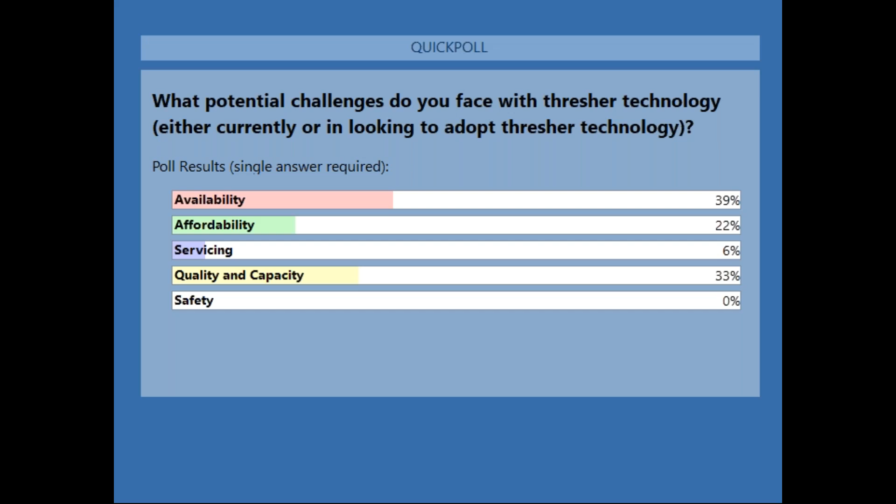Carrie, I know that it still says showing the poll on your screen. Is that still visible on your screen? I still see the poll, yeah. Okay, it's supposed to have been closed down. Is there any way we can switch over to sharing your presentation? There, can you see it now? Perfect, that is it. Many apologies. Thank you everyone for bearing with us. Sorry, Dr. Clark. No problem.

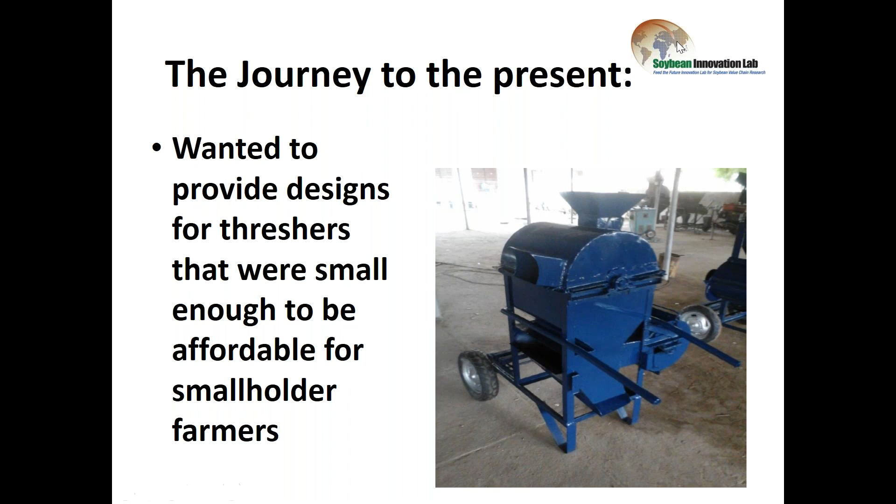Okay, so you guys can see the thresher there on the right was the first one we did. So we were also asked by an NGO in Ghana to make a bike-powered version, which we did also.

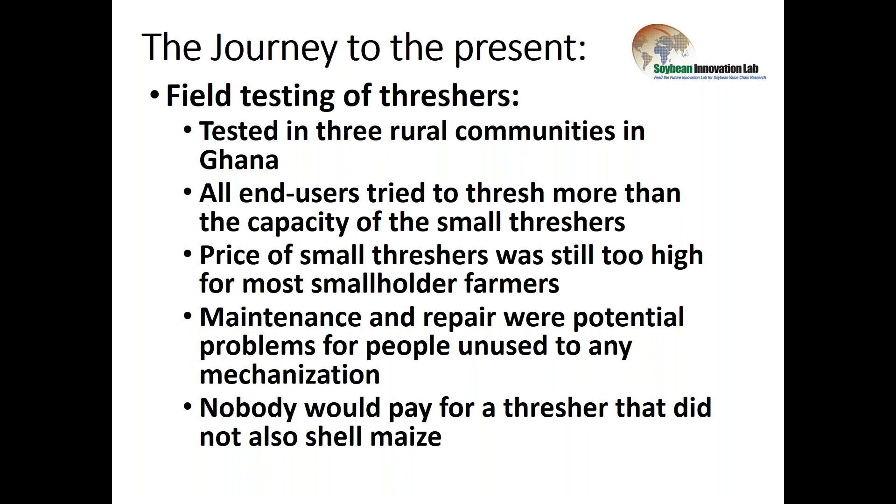So what did we find? Well, we field tested those threshers. We tested them in three rural communities in Ghana. And what we found was that pretty much all end users tried to thresh more than the capacity of the small threshers. So they tried to expand it to more than just one farm, or they tried to shove things into the opening, which jammed up the thresher. So we also found that the price of the small threshers was still too high for most smallholder farmers. During our field testing, we also realized that maintenance and repair were potential problems for people who are unused to any mechanization.

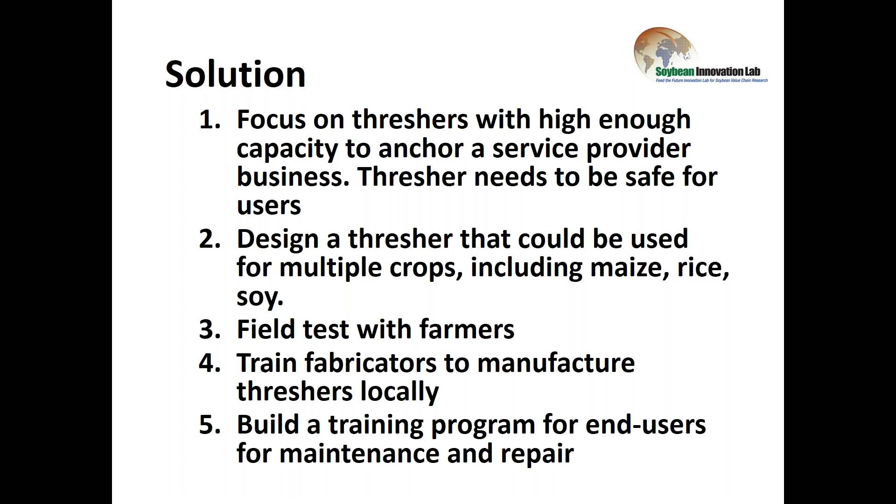During village or community surveys and focus groups, we were pretty much told that nobody's going to pay for a thresher that did not also shell maize. So our solution was to completely change the focus of our program. Now we focus on threshers that have a high enough capacity to anchor a service provider business, the service provider being somebody that would service maybe 30 or 40 farmers and make a living out of being a thresher provider.

We also wanted to make sure that thresher is safe for the users. So we designed a thresher that could be used for multiple crops, including maize, rice, and soy. We've been field testing that with farmers. We also train fabricators to manufacture threshers locally, which is a major aspect of our thresher program, because we do believe in local fabrication.

And we have also built a training program for end users for maintenance and repair. So to go over those objectives first: we focus on threshers with high enough capacity to anchor a service provider business. We used two Ghanaian fabricators who had extensive experience. They provided designs and working models, and we then field tested those.

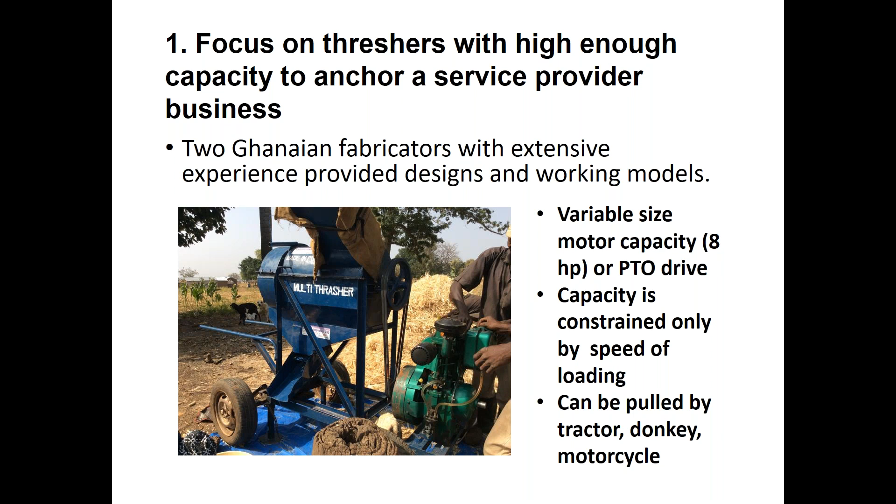They have variable size motor capacity. The one in the photo has an 8 horsepower motor. You could also have a PTO drive instead of a diesel motor. The capacity, or the speed that the thresher can go, is only constrained by the speed of loading. The thresher itself can thresh as much as you can put in it very quickly, but what's slow is putting things in it. Of course, maize loads a lot faster than soybean.

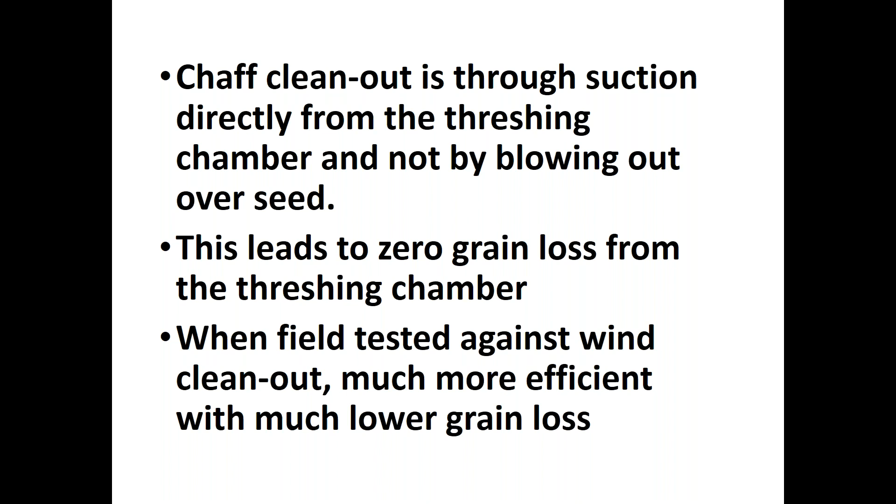And then we wanted something that could be easily pulled by various means, like a motorcycle, a tractor, or even a donkey.

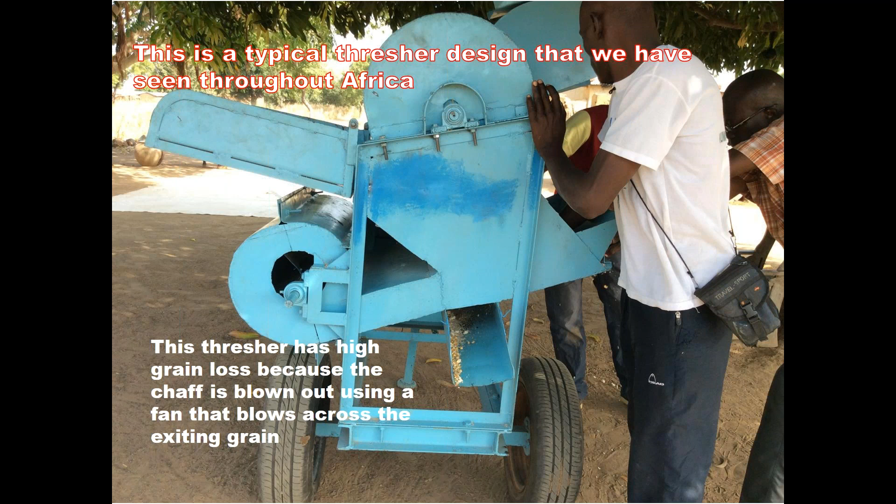One aspect of this thresher is that the chaff cleanout is through suction directly from the threshing chamber, and not by wind blowing out over the seed. I'll show you some pictures of what I mean in just a second. This kind of chaff cleanout led to zero grain loss from the threshing chamber. When we field tested this against machines that used wind cleanout, where it blows across the seed, we found that this thresher was much more efficient with much lower grain loss.

Here's a photo of a typical thresher design that we've seen throughout Africa. You can see there's a blower fan on the left side. The seed is fed into the threshing chamber at the top, the seed drops down, and then that blower fan blows across the seed to blow the chaff out. That design we found has very high grain loss because of that fan blowing against the exiting grain.

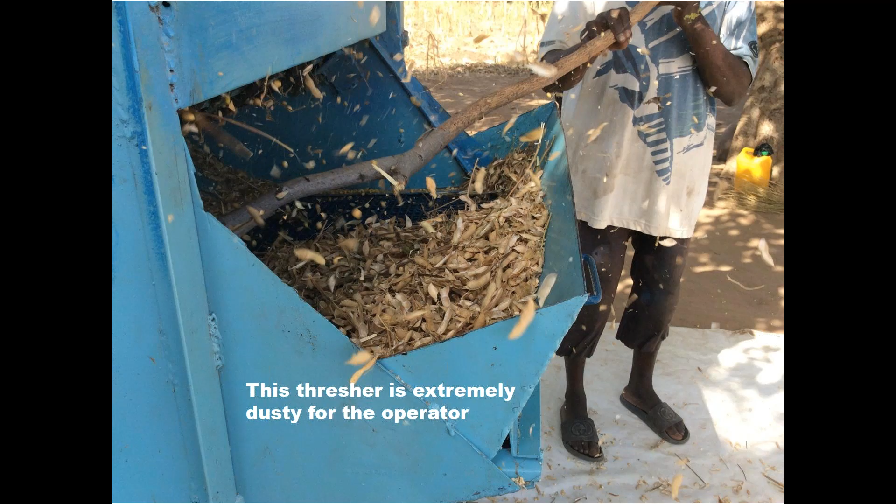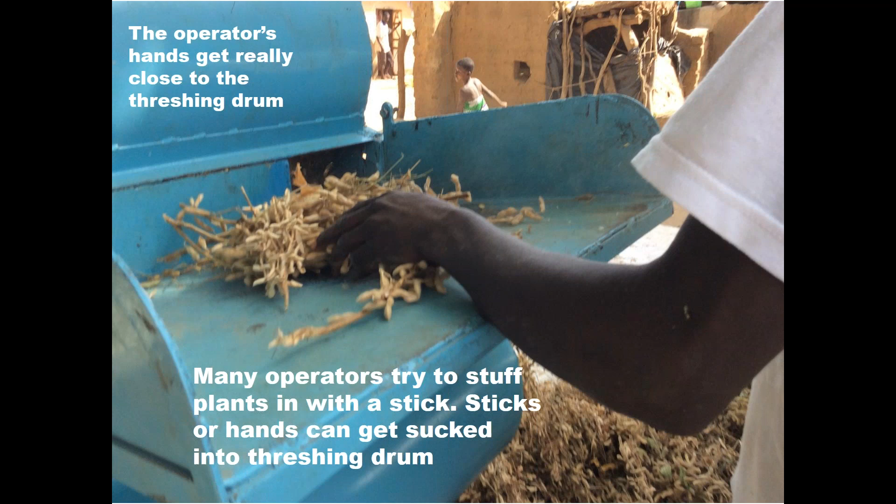This thresher can also be extremely dusty for the operator. Here you have a guy that actually has to use a stick to try to keep the chaff from clogging up. But the biggest thing I found was that the operator's hands get really close to the threshing drum. As I was watching this machine being used, I was sure I was going to see somebody lose a hand. I also watched many operators try to stuff plants in with a stick, and at one point we did see a stick get sucked into the threshing drum and fly out the other side, which was extremely dangerous. So both sticks and hands can get sucked into that threshing drum.

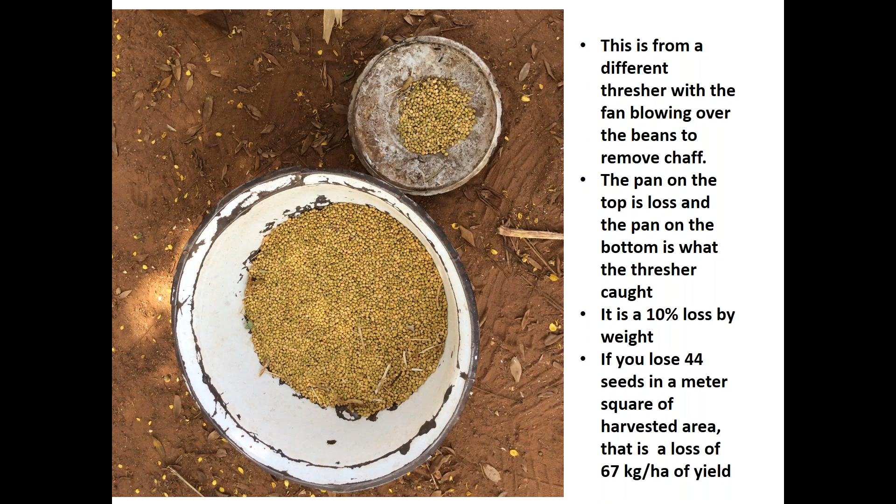This is from a different thresher, not the light blue colored one, but it also has the fan blowing over the beans to remove the chaff. The pan on top shows how much loss occurred. We caught the loss in a tarp, and compared it to what actually was threshed in the larger white pan. By weight, it was a 10% loss. That can be very significant, because you can see that's not a whole lot of soybeans there that we've threshed. So that's a large loss for the amount of soybean plants threshed.

In fact, there have been calculations that if you lose 44 seeds in a meter square of harvested area, that's a loss of 67 kilograms per hectare of yield. So that can really add up. It's important that we not have threshing machines that lead to larger loss.

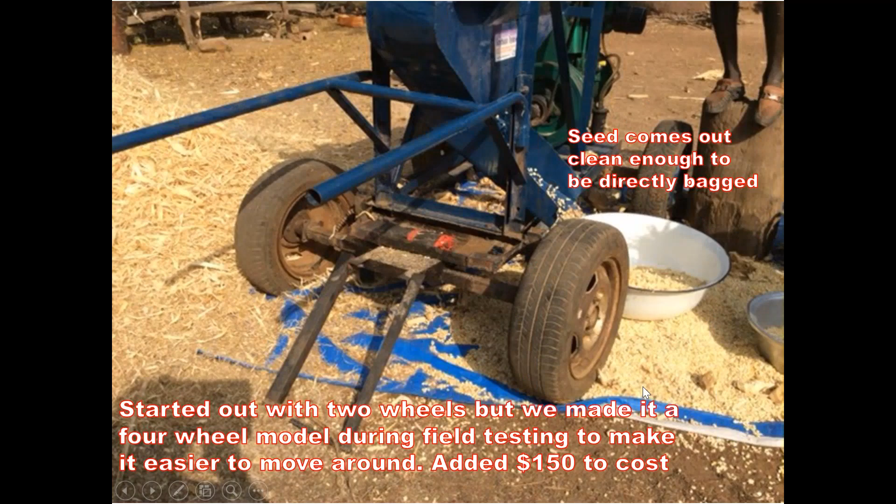So the seed actually comes out clean enough to be directly bagged.

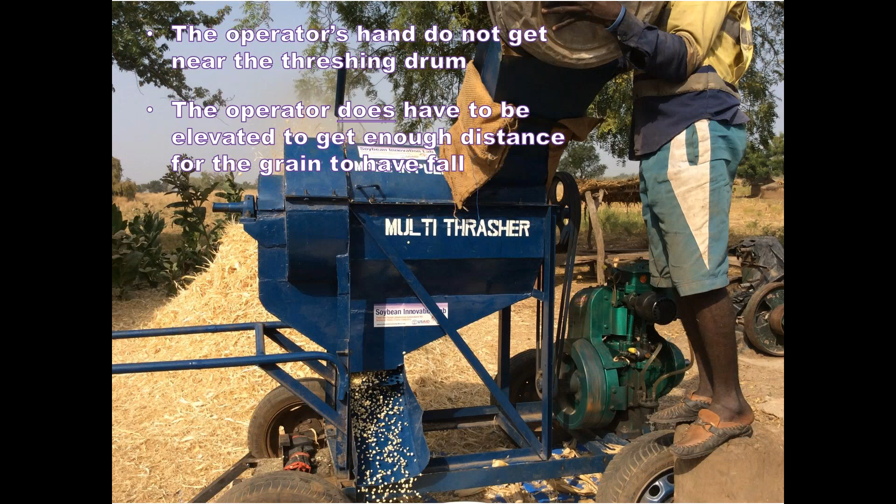We started out with this model with 2 wheels, but we ended up making it into a 4-wheel model during field testing, because people were having trouble picking it up like a wheelbarrow and moving it around. When we added the second axle and the other 2 wheels, it did add $150 to the cost, but it made it significantly easier to transport.

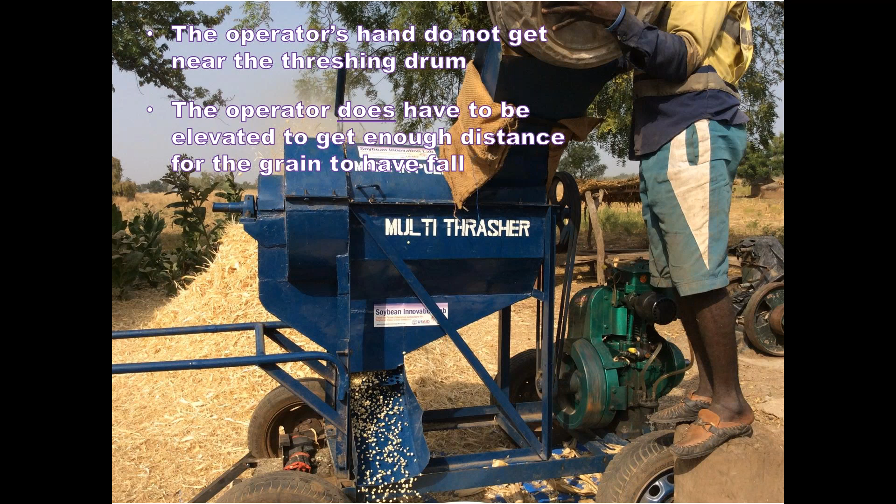Where they put the grain in is at the very top, at the end of a long chute. So now you're not going to be able to get the operator's hand into the threshing drum, so it's much safer. One issue, though, is the operator does have to be elevated to get enough distance for the grain to fall, so the machine has to be somewhat tall for all the functions it needs to perform.

In this community, they chose to stand on a log, but we will be encouraging people in the future to come up with a better way for the operator to stand.

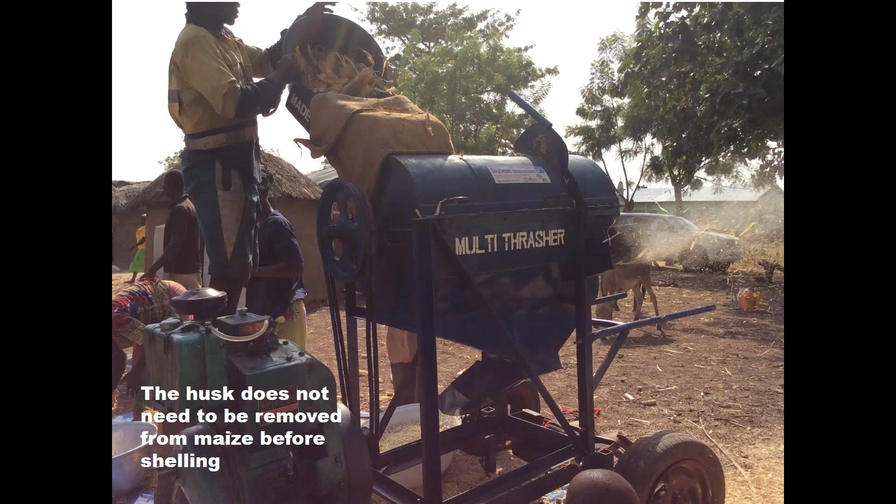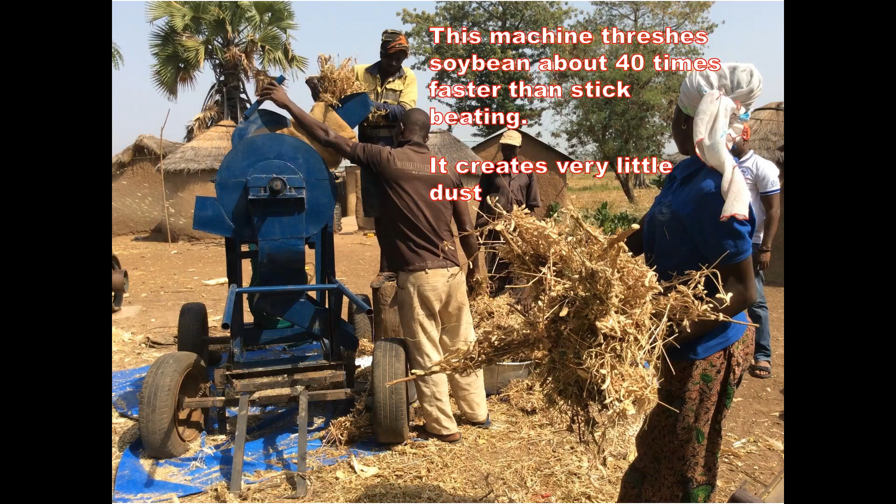When you thresh soybeans, this machine threshes soybeans about 40 times faster than stick beating, and it creates very little dust.

Our second goal was to design a thresher that can be used for multiple crops, including maize, rice, and soy. We did field test with all those crops, and it worked well.

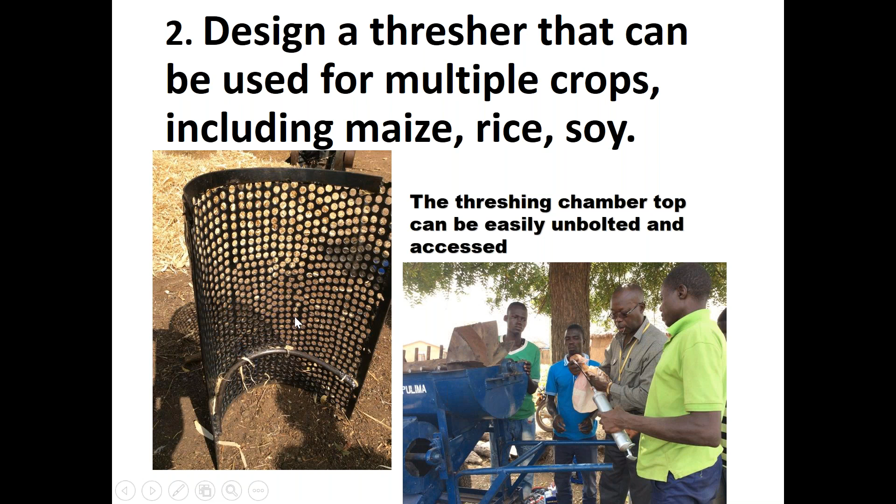This is the sieve concave to the left, and we have interchangeable concaves according to what crop you want to use it for. If you look along the edge of the concave, you can see a bolt. They unbolt very easily, and then they're interchangeable.

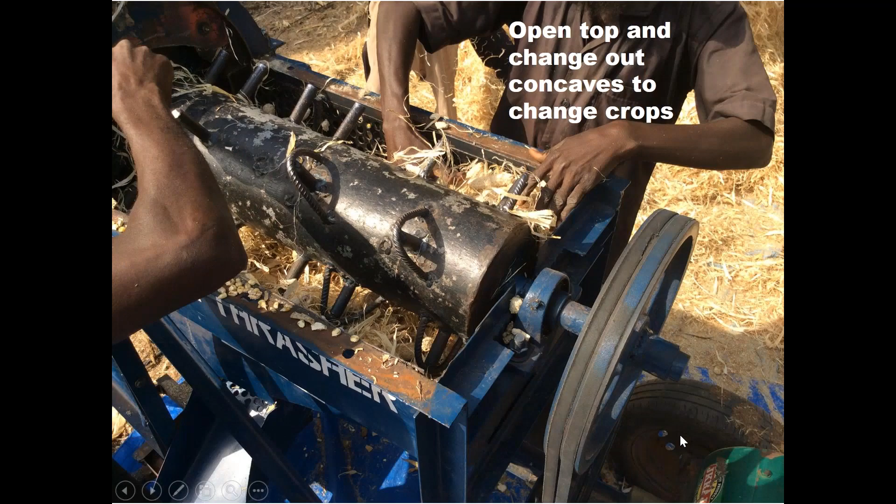One thing that's very important, though, is that because the users need wrenches, it's important that the fabricator make sure the user has the correct wrenches they're going to need to do these operations. So you open the top.

You don't have to remove the threshing cylinder you see there with the spikes on it. All you do is unbolt the sieve concave and pull it out from one edge, then put the next one in and bolt it down.

For field testing with farmers, we tested in 2017 in rural communities in Ghana, and testing will continue in 2018. The design is currently being used by farmers in the Upper West region of Ghana. We're also having a workshop August 6th to 11th for modifications and final plans. After that workshop, the designs will be publicly available.

A highlight of our program is that we train fabricators to manufacture threshers locally. I feel this is very important because local fabrication can lower costs and it creates jobs. Local fabricators are also more in touch with their customers' needs and can adapt to those needs.

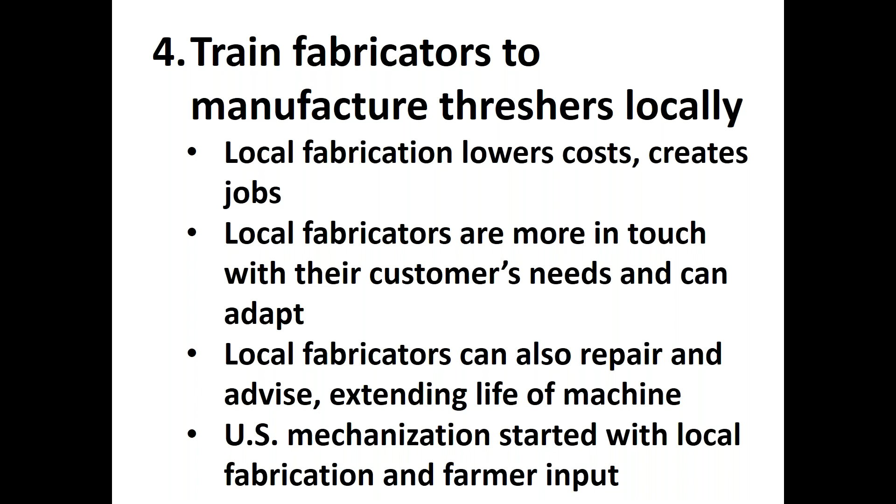The best fabricators I work with in Ghana are ones that actually go out to the field, see how it's running, and get constant feedback from their customers. Local fabricators are also able to repair the machines and advise, which extends the life of the machine. They can help teach the end users how to use it, and they're readily available for repairs and can help people locate parts.

When you look at the history of mechanization in the United States, U.S. mechanization actually started with small local shops doing fabrication in conjunction with farmer input.

So why do we not just give the designs to fabricators and let them do as they wish? Why do we train them? Well, to begin with, not all fabricators can read CAD plans, which is computer-assisted design. These are 2-dimensional or 3-dimensional plans, and for some people those are going to be hard to read, especially without experience and training. So that's one of the things we do during training, teach them how to read the designs.

Without training, you'll see a lot of fabricators reverse engineer, meaning they'll find an imported or locally made piece of equipment, look at it, figure out how it was made, and then make it themselves. The problem is that can lead to inferior products that lack important design elements. There may be some crucial element they missed that will make the difference between a functioning thresher and one that doesn't work well.

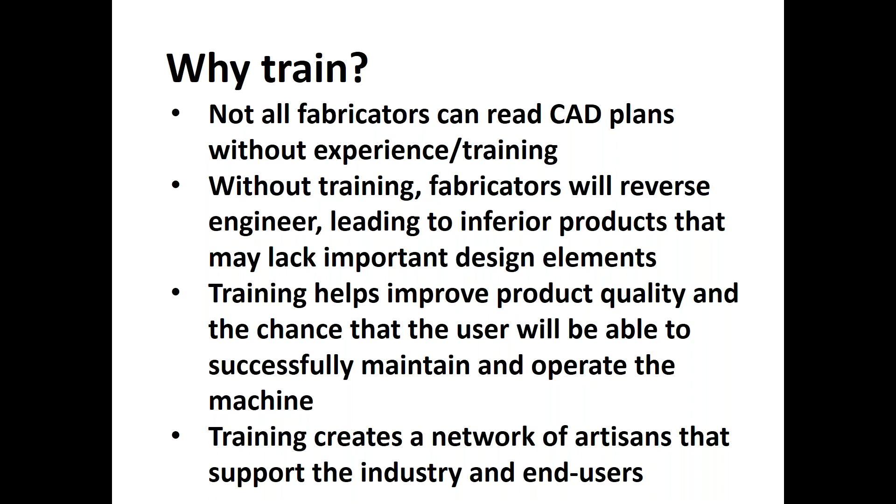Training helps improve product quality and the chance that the user will be able to successfully maintain and operate the machine. So if the fabricator has a good understanding of consistency and quality from product to product, that creates a more consistent product for end users, and allows end users to exchange information and experience between each other, which helps ensure proper operation and maintenance.

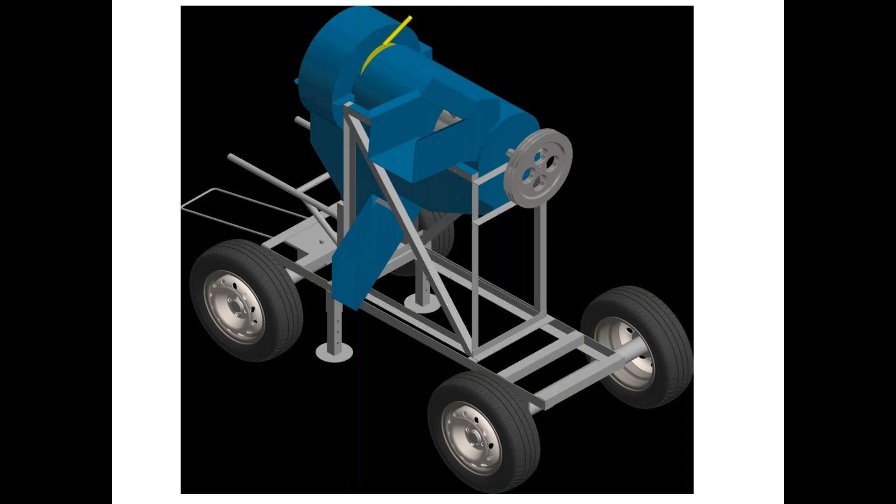Then again, training creates a network of artisans that will support the industry and end users. We've found that when these guys can talk to one another, new ideas come up, modifications that work get passed from fabricator to fabricator, and they have somebody to talk to and figure out what's working and what's not working in their business.

So this is what a CAD design would look like, a 3-dimensional drawing. These are the designs given to the fabricators, and for something like this it's kind of confusing. They don't really know what to do with that. So during our training, we go through how you utilize a design that looks like this.

So we did our first training of 12 fabricators in Ghana in 2016. It was funded by Advance and ATT, which is ACDI VOCA and IFDC. During our training, we actually built machines. We broke into different teams, 3 or 4 per team, and built different kinds of machines. It's a 6 to 8 day training.

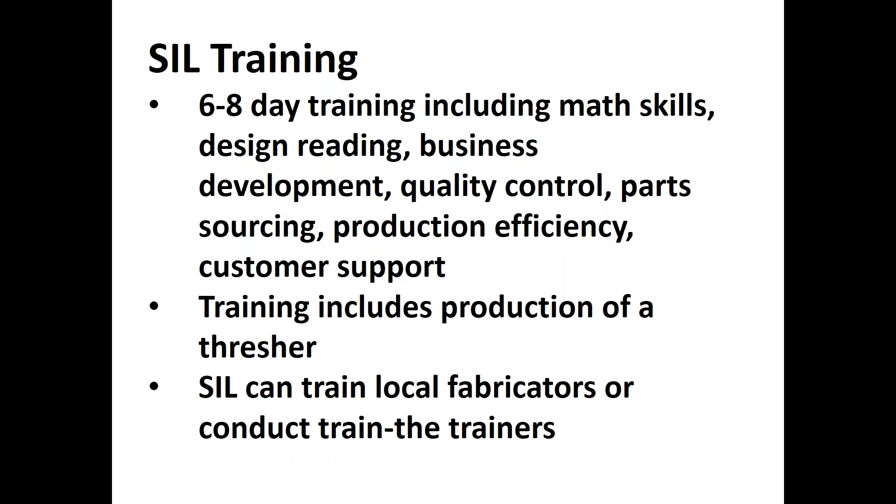It includes teaching basic math skills such as calculation of circumference and area. It includes design reading, business development, quality control, which we find has been missing in local fabrication and production. We talk about part sourcing and production efficiency. Currently, most fabricators in Ghana, if they get an order for 10 threshers, will fabricate each thresher one by one. So we discuss how using an assembly line method makes you more efficient and can lower your costs. We also work with the people we train on customer support, how they'll find and keep customers, and learn how to work with the customer in field testing.

So as I said, the training includes production of a thresher. We either train local fabricators or we train the trainers. And also we're following up.

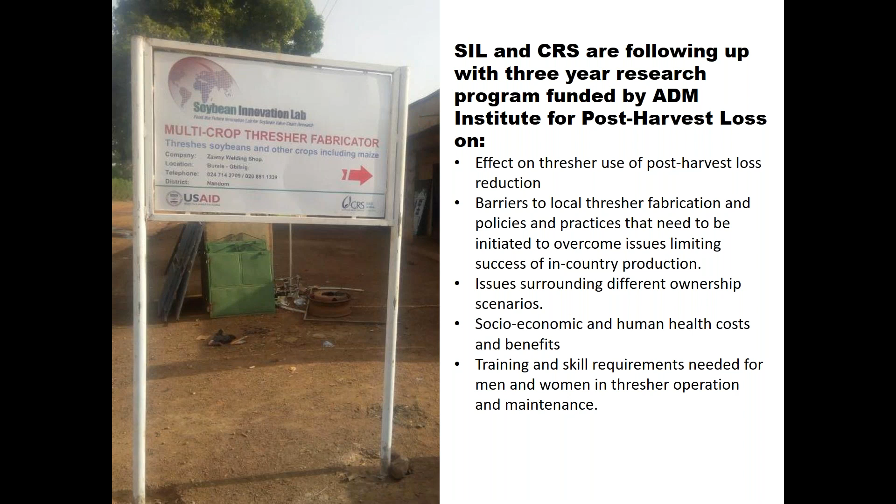Threshing programs need to be funded because it improves post-harvest loss reduction. It can create jobs. It allows people to reduce drudgery. It keeps people from expending so many calories on manual beating and that kind of thing. So we're trying to provide evidence for other organizations to be able to support thresher fabrication programs.

We're also working on figuring out exactly how men and women differ in thresher operation and maintenance, and what kind of training and skills are needed for both.

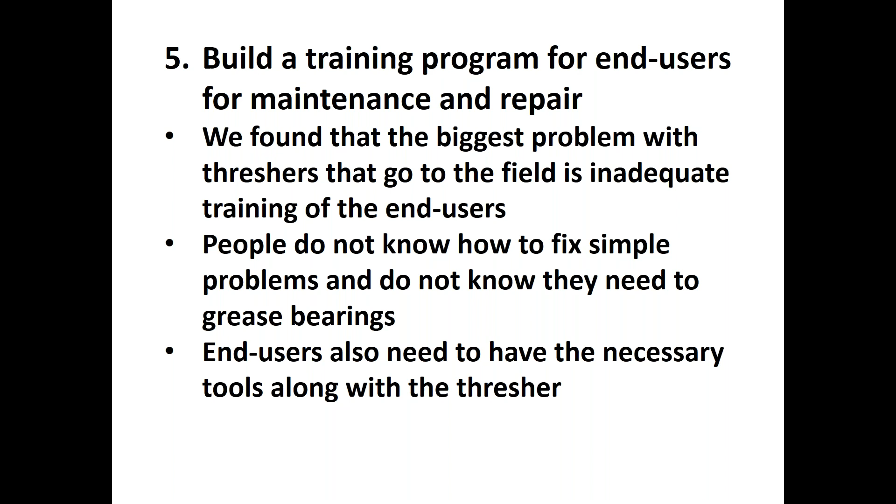So we have built and are building a training program for end users for maintenance and repair. We found that the biggest problem with threshers is that they go to the field with inadequate training of the end users. Sometimes they're told how to operate, but they're not told how to fix, how to open up the top of the machine, or fix a belt or fix a pulley, or what to do if the engine stops working.

One of the biggest things I found is that nobody was being told how to grease bearings. That included the fabricators were not greasing bearings, which it's important for the life of a bearing that it receive constant grease.

We also want to make sure the end users have the necessary tools that go along with the threshers. So we're encouraging our fabricators to include a maintenance package that would be paid for by the end user, but would make sure that they have the correct things that they need to be an operator and maintainer. So the minimum tools that we've found are needed, if you have a big thresher like this with wheels, then you're going to need a jack.

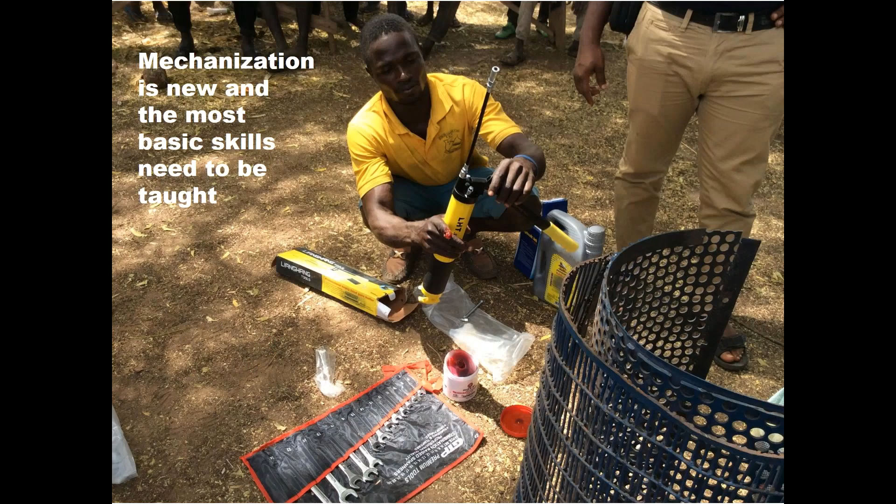You need the proper wrenches or spanners, as I think they call them in many parts of Africa, to be able to loosen or tighten the engine, the belts, the pulleys, take the top off, whatever. You have to have proper wrenches or spanners. Motor oil, so we include that in the package to remind people that the engine oil does need to be changed. We go over that in our training, how to change that. We provide a grease gun and grease.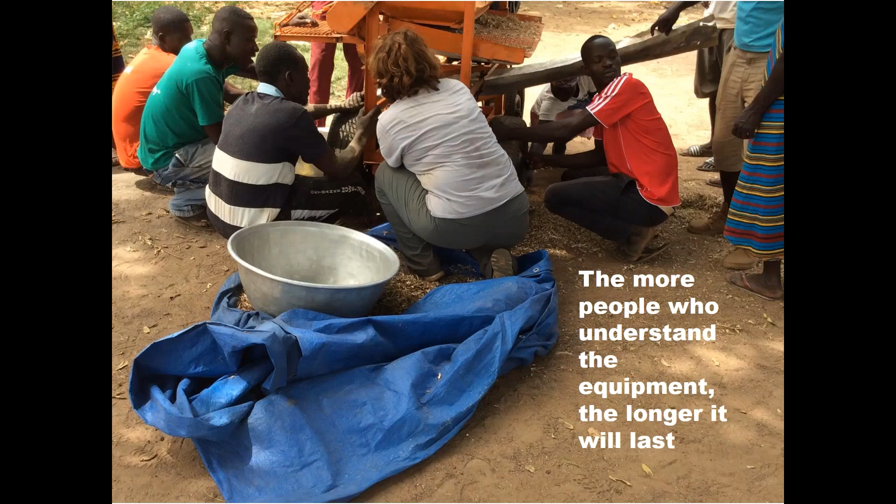For many people in rural communities in sub-Saharan Africa, mechanization is something that's new, and most of the basic skills need to be taught. So here you can see we're teaching an operator how to load his grease gun, and then we'll teach him how to grease the machine.

We teach them how to change the oil, how to check the oil, how to make the motor run when it won't start. What are the possibilities? What could be wrong? So we troubleshoot the entire machine when it goes to the field.

We find that the more people who understand the equipment, the longer it's going to last. So if you're afraid of your equipment, if you think it's something that you can't do, then you're not going to be a successful operator and maintainer. So really understanding the equipment is vital to its success.

The cost of the multi-thresher in Ghana, the materials, the metal, the wheels, the axles, the pulleys, that kind of thing, is about $1,200. The diesel engine for 8 horsepower was $525. Machining, which they have to have certain shafts machined, pulley keyways machined, that was $150.

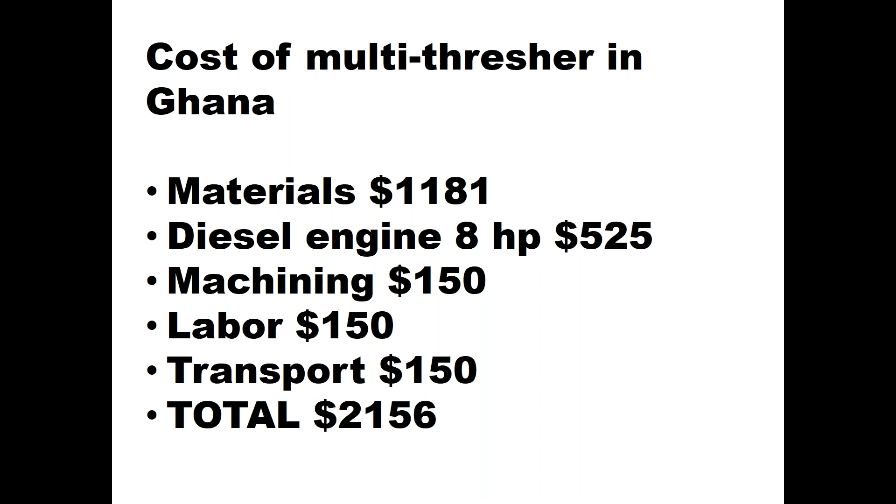The guys that we have doing it in Ghana are only charging about $150 in labor, which is extremely cheap for how long it takes to build one of these. But they find that that's still a profitable level of labor charge. Then to get it transported to the village, about another $150. So they're selling these for just a little under $2,200 in Ghana.

And so that is too much money for most smallholder farmers, but we're finding it's not necessarily too much money for a service provider or a larger farmer who have access to financing options or who have savings. And I should also mention that the service providers that we know say that the thresher pays for itself in 1 to 2 years.

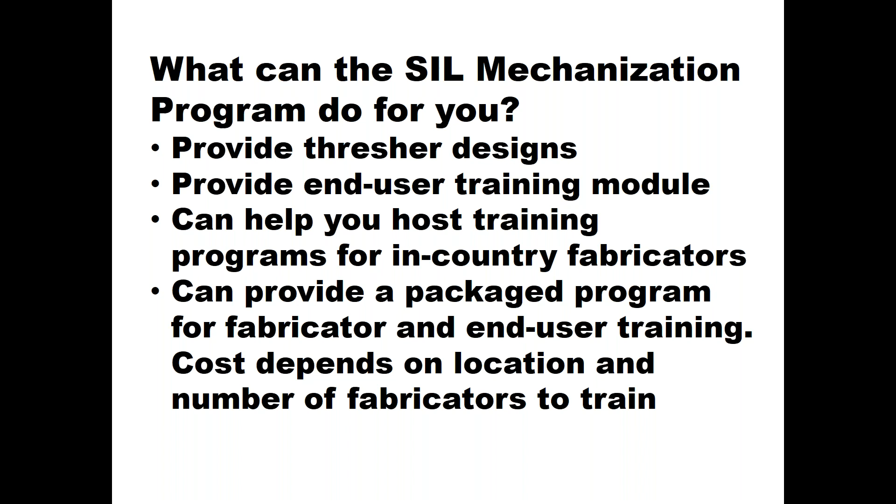So what can the SIL mechanization program do for you? First, we can provide thresher designs, and we can provide our end user training module. We can help you host training programs for in-country fabricators, or we can also provide a package program for fabricator and end user training.

So we can either consult with you and tell you how to successfully do a training yourself, or we can come to your location with funding provided by you and provide the training, the fabricator and the end user training, ourselves. And then the cost of that would depend on your location and the number of fabricators you want to train.